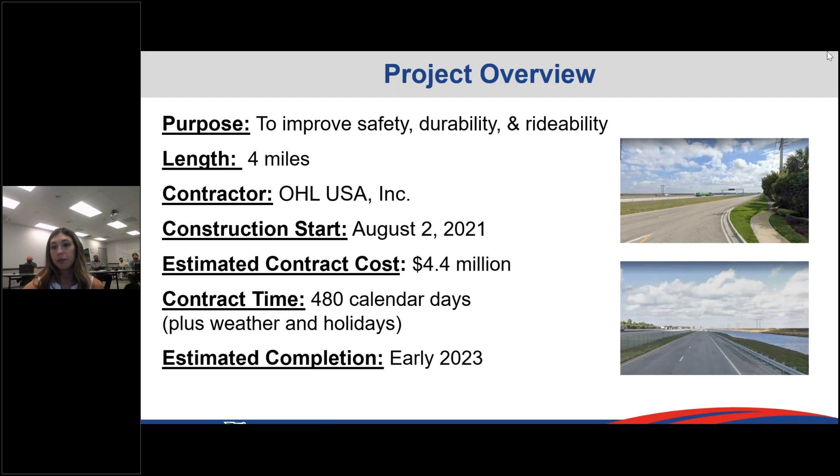So the project overview: the purpose of this project is to improve safety, durability, and rideability. The length of this project is 4 miles. The contractor is OHL USA Inc.

Construction is starting August 2nd, 2021, and the estimated contract cost is $4.4 million. Contract time is 480 calendar days, but this does not include any weather or holidays that will be added to the contract. Estimated completion is early 2023.

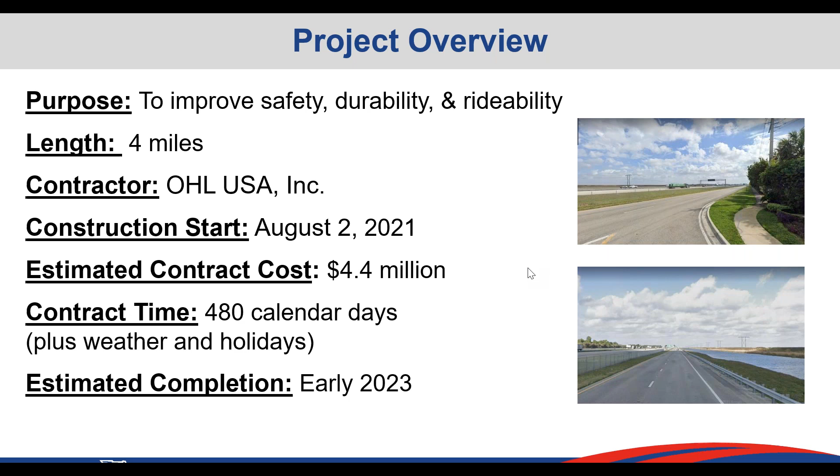Moving on to slide 10, project improvements. So the project improvements included in our project are milling and resurfacing the roadway and replacing pavement markings, widening the shoulder along State Road 84, installing bicycle lanes at Indian Trace and Glades Parkway, and repairing guardrail as needed along westbound State Road 84. Again, our project limits are Glades Parkway to Weston Road along State Road 84.

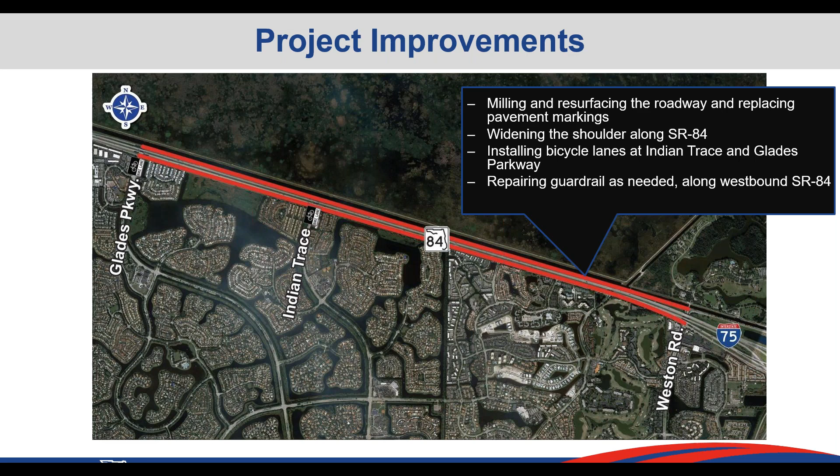And now we're going to move on to slide 11. And Eric Sivila, our senior projects engineer for the project, can speak on these slides. Hey, good afternoon, everyone. This is slide 11. The next few slides will show the typical sections, which basically show the configuration of the roadway along different areas of the project. This first typical section is eastbound State Road 84.

The existing configuration is a 2-lane roadway, both in the eastbound direction. These 2 lanes will be milled and resurfaced. There will also be some overbuild. When you see overbuild in these typical sections, basically overbuild is correcting the cross slope of the road with the asphalt to provide better drainage and make the road safer. So the 2 eastbound lanes will be milled and resurfaced, and cross slope will be corrected with overbuild.

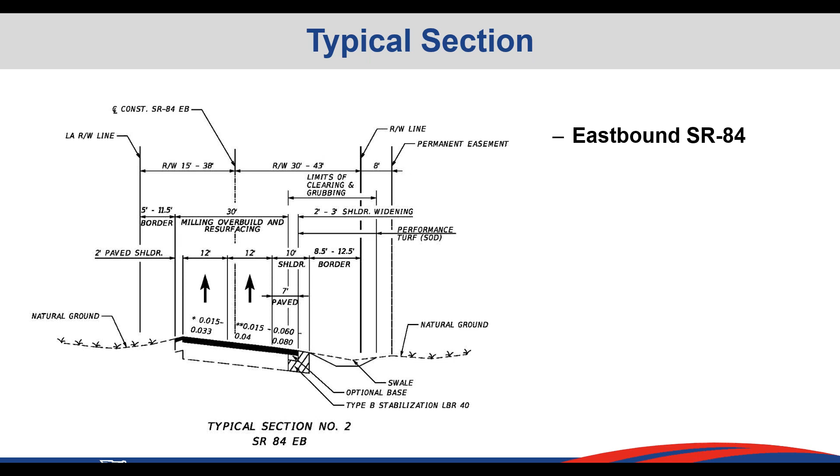The inside shoulder will also be milled and resurfaced. The outside shoulder will be widened to a total of 10 feet. The first 7 feet out of those 10 will be paved. The ditch or the swale outside of that outside shoulder will also be excavated a little deeper to improve the drainage conditions along the project corridor. And this typical section basically depicts these different improvements that I just mentioned.

This is slide 12. This is westbound State Road 84. Similar to the eastbound side, there will also be milling, resurfacing, and overbuild. Along westbound State Road 84, there will be no widening. The entire road, including both shoulders, inside and outside, will be milled and resurfaced.

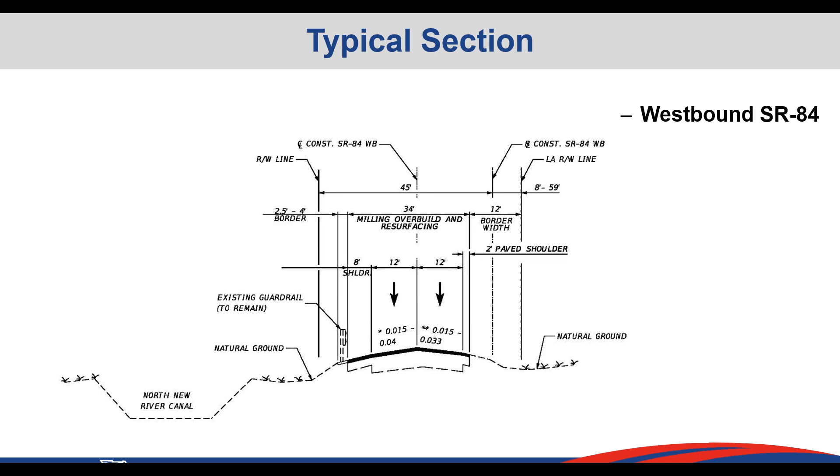This is a typical section for Indian Trace. This is slide number 14. Similar to the previous slide, the left side of the screen is the southbound and the right side is the northbound. On the northbound side, at the end of the project, you'll have a single travel lane followed by chevrons, a 5-foot bike lane, and a turn lane. On the southbound side, you'll have a left turn lane, 2 travel lanes, a bike lane, and a variable width turn lane. The entire road will also be milled and resurfaced.

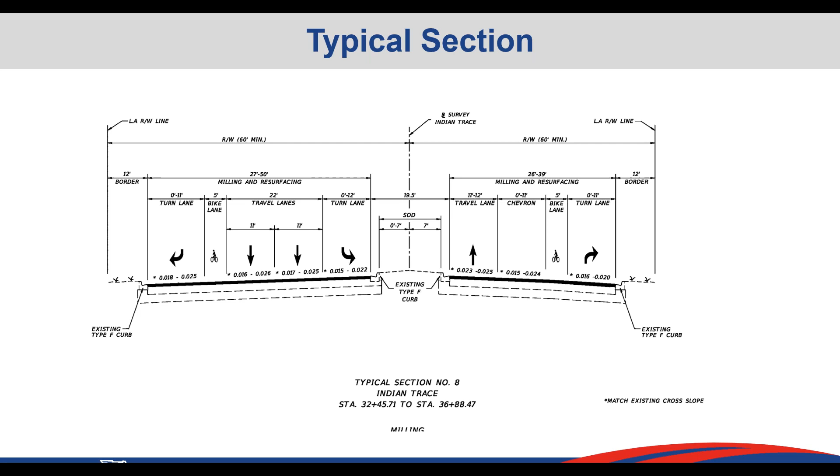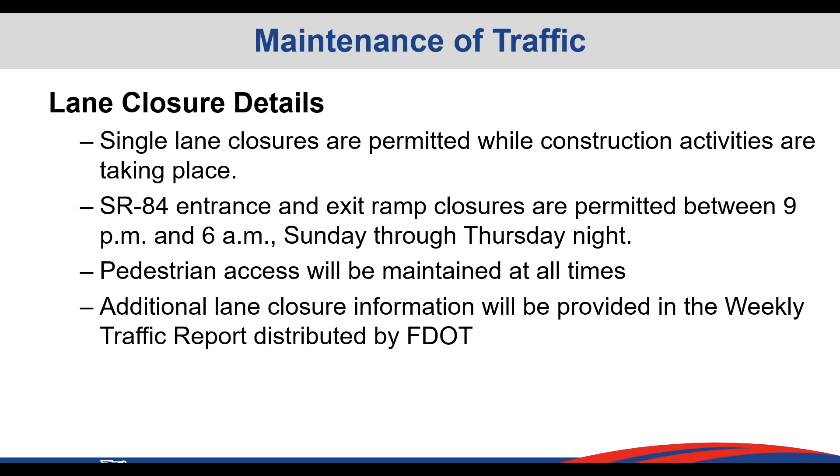So moving on to slide 15, maintenance of traffic. Single lane closures are permitted while construction activities are taking place. State Road 84 entrance and exit ramp closures are permitted between 9 p.m. and 6 a.m. Sunday through Thursday night. Pedestrian access will be maintained at all times. Additional lane closure information will be provided in the weekly traffic report distributed by FDOT.